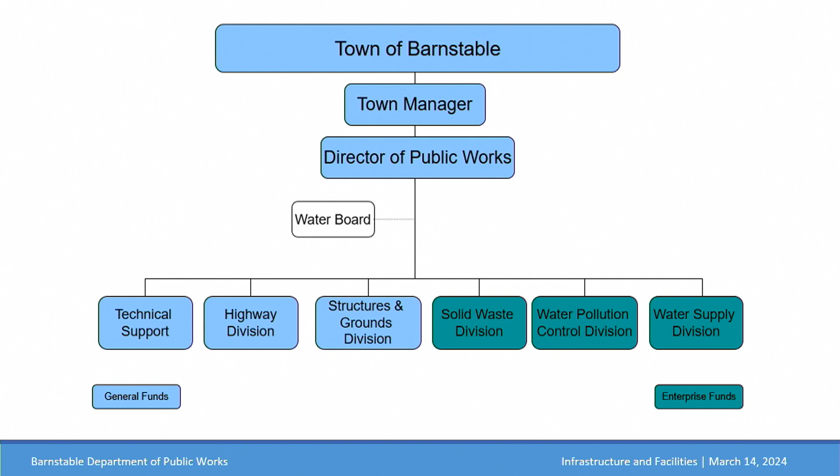As you can imagine, a lot of different types of infrastructure exist in the town of Barnstable. We have 2 coasts and the 4th largest roadway network in the state. I won't read all the types of infrastructure on here, I probably even missed some, but we have a lot that makes the town run. I'm going to focus, as Dan alluded to, on the horizontal types of infrastructure: roads, bridges, marine infrastructure, and I'll touch on water and wastewater at the end.

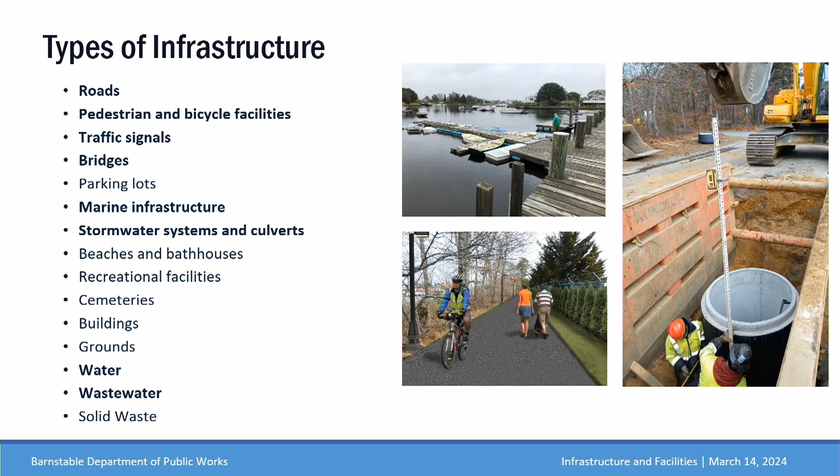So how do we pay for infrastructure in the community? There are really 2 kinds of budgets we do each year. The fiscal year runs from July 1 to June 30th. There's the operating budget, which is for operating purposes. Of the 6 divisions we talked about, 5 are really operation staffs. They're not getting into the capital budget as much as my group would be, or the town architects group, which handles the capital budget, being the projects.

Capital projects are really one-time projects, generally over $50,000. They're requested on an annual basis, and generally the funding is good for a 3-year duration. We submit our requests each November for consideration by town leadership, and the town manager's office ultimately makes a recommendation to the town council. Around this time, we're going to start having those hearings next month. They're presented to the town council in the April timeframe, and funding for those that get voted for becomes available on July 1.

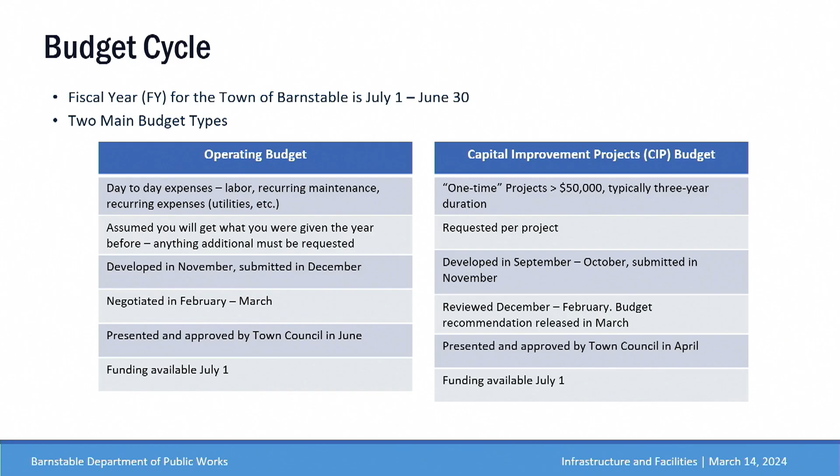So we really have to prioritize, and we have an internal process the town goes through to try to prioritize: which infrastructure projects do we need to do this year, which ones are safety issues, which ones are just desires of the community that need to occur, which ones do we need to do to make sure we stay on top of routine maintenance. I'll talk about that a lot tonight. So just for scale, there are a lot of projects we submit every year for consideration, and by that nature there is certainly a backlog of projects. We can't get to everything, can't fund everything.

So roads will be the first focus for infrastructure, probably the biggest focus I'll talk about tonight. I'll touch upon the other things as well. As I alluded to earlier, this map's a little hard to see on the screen, hopefully better on your smaller screen. The town of Barnstable has the 4th largest roadway network in the state, out of the 351 communities. There are 3 principal types of roads in the town. There are state roads, which in Barnstable are really Route 6, Route 28, portions of Route 132, not all of Route 132, and most of Route 6A, the village center being the outlier, which is actually town-owned or public.

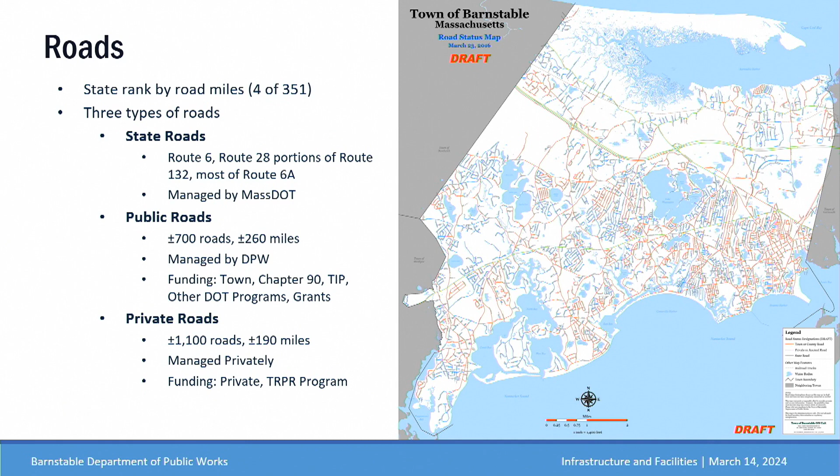There is one other program available for fixing private roadways, and it's really for the connecting roadways that are private. So these large main roads that feel like they should be public roads - there was legislation passed that the town council can appropriate funds to fix those roadways. That has to be done through our sewer construction and private ways fund, and that is a tool that has been used in the past as well to fix certain private roads.

All right, so I alluded to the Transportation Improvement Program. The Transportation Improvement Program is really how regional roadway projects occur. It's a planning document that is required of the Regional Planning Authority, which is the Cape Cod Commission. They're required to prepare it and submit it to DOT, and it helps advise DOT as to what the funding priorities are in the area.

So this addresses roadways as well as transit, as we just heard from the transit folks, and multimodal projects. It's certainly financially constrained each year. It's generally federal and state dollars that every community on Cape Cod is vying for. And it's a critical decision-making process.

And the critical decision-making process really comes via a couple boards that the Cape Cod Commission hosts. One of them is the Joint Transportation Committee, which has a representative from each town. I'm the representative from Barnstable, which works through a lot of the groundwork that informs the regional plan. We make advisory decisions for the Metropolitan Planning Organization, who ultimately votes on the TIP each year. The Metropolitan Planning Organization has fewer members, but they have regional membership from each general region in the community. Barnstable actually has our own member as well.

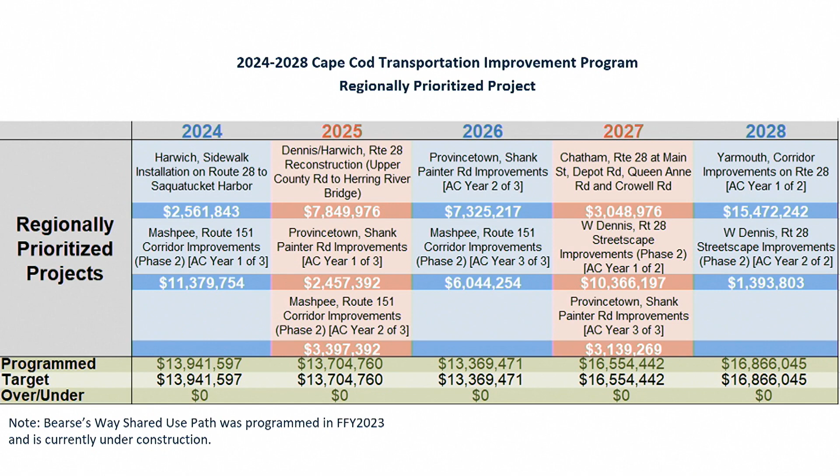This is a graph showing last year's federal fiscal year 24 TIP program, the projects that were funded and how they were funded. Some projects are funded over multiple years, some are not. There are no Barnstable projects on last year's TIP. We did receive money in the federal fiscal year 23 TIP for a regionally prioritized project, the Bearse's Way Shared Use Path Project, which is under construction now and about to commence. If you've driven down Bearse's Way near our office recently, you'll see a whole bunch of stakes and surveyors - they're about to break ground on that effort.

One project not seen here, because it was on last year's state prioritized TIP, was the Cape Cod Rail Trail Phase 3, the first segment. If you look at the Cape Cod Rail Trail, the big gap is Barnstable - Sandwich is currently working on an extension to the Barnstable town line, and Yarmouth has an extension about halfway through the town. Phase 3 is a project in partnership with Yarmouth which will bring the Cape Cod Rail Trail from Yarmouth into Barnstable and to Mary Dunn Road at the end of Independence. That project is programmed for federal fiscal year 24, the year we're in. We anticipate the bids going out later this year, with construction starting hopefully before the end of the year, most likely sometime next year. So that's exciting - finally having the Cape Cod Rail Trail coming this close into the community.

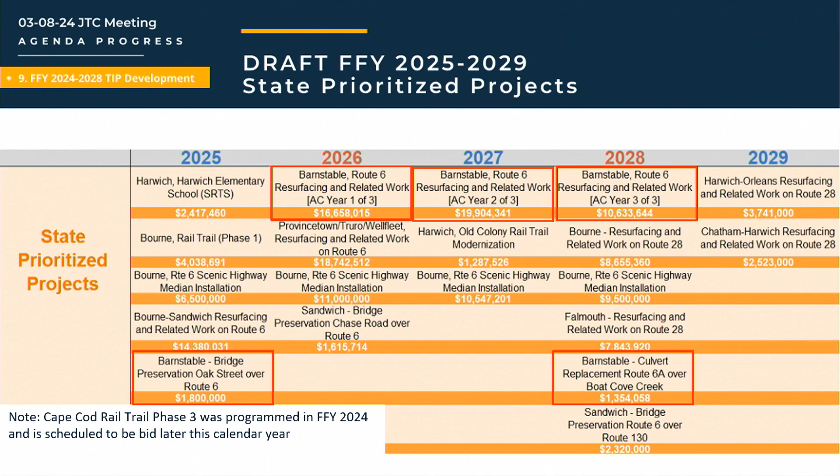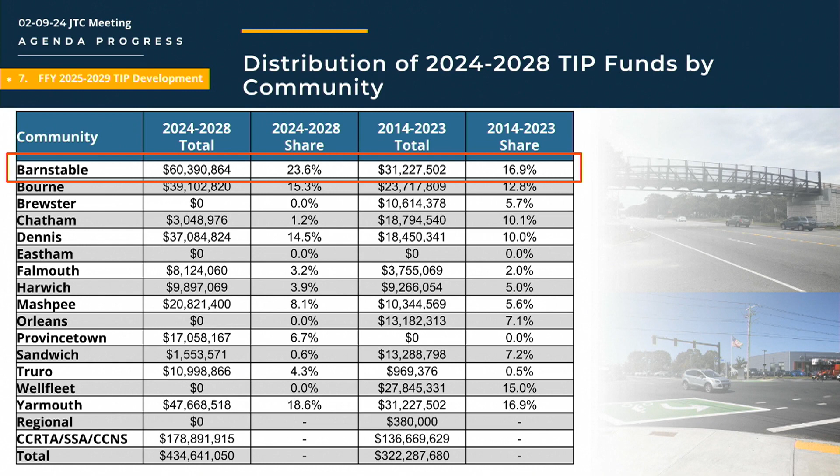I wanted to show the distribution of funding through the TIP - I know I keep talking about the TIP a lot, but it's really important because it's the regional planning document and how these large projects occur. Barnstable, being the biggest community on the Cape, has received a high percentage of the funding - 23% of the funding in the 24 to 28 timeframe. A lot of that was on the state prioritized list, but that's 24% of the money coming into Barnstable. From 2014 to 2023, it was about 17% for the town of Barnstable, which is the highest for any of the communities. So money is coming into Barnstable through that program, and projects are occurring.

There are eligible projects that are in the pipeline in the future as well. So these are some of the bigger projects that we're anticipating seeing coming in our regionally significant roadways over the next 10 years or so, right?

So the Route 132 corridor improvements, that's the town-owned section. That's a project that we're leading. That's a regionally prioritized project that the town of Barnstable is advancing. We're working through designs on that now. We've held our first public informational session on that in January.

That's not going to happen fast. This program does not happen fast. It takes years to get onto the TIP, get slotted, to jockey for position for those funding, and to get placed. But this is a project we're actively working on, and we are envisioning will get funded through the TIP.

We're really hoping it'll be a state prioritized project eventually due to the regional significance, but that's something that we'll be working to achieve later on as we get closer to construction there, right? We think we're probably about 5 years or so away from construction actually starting on that project.

Couple state prioritized projects that our partners at MassDOT are working on, an airport rotary retrofit. So this project actually will start at the end of the under construction road project of the Yarmouth Road and Route 28 intersection, and will come through the airport rotary and not significantly change the geometry.

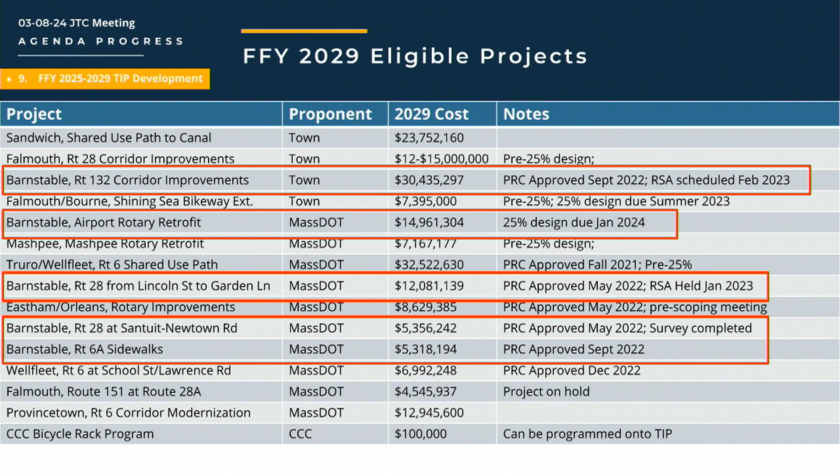Yes? Is that in Barnstable and West Barnstable? The extents of that project are actually from just outside the village to Route 132 currently. Though, being this early in the process, that's certainly subject to change based off public input.

All right, so talked a lot about regional. How do we approach roads here in Barnstable, right? So we do this really principally two ways. We have really a recurring CIP, so capital improvement project. That's our public roads maintenance program. Really what this does is it fixes our roads.

It's preventative maintenance of our roadways such that if you stay on top of preventative maintenance, and that's what the graph on the right kind of depicts, if you stay on top of preventative maintenance and do some of these PM type improvements, you really ultimately save tremendous amounts of money in the long run because as you get into full reconstruction of roadways, it gets significantly more expensive than filling in cracks or just doing a surface overlay or even a mill and overlay. You can see that it's almost exponential, the increased costs as you get to these more in-depth repairs, right?

So our public roads program is informed by pavement surveys that we do every 3 years. What that does is it basically drives every road in town, gives it a score. They're called road surface ratings or RSRs. And we use that to inform what roads need to be fixed, right? So it's a strategic plan. We use data. It's data-driven to make decisions as to which roadways need to be improved. These surveys will suggest the type of restoration that should happen, right?

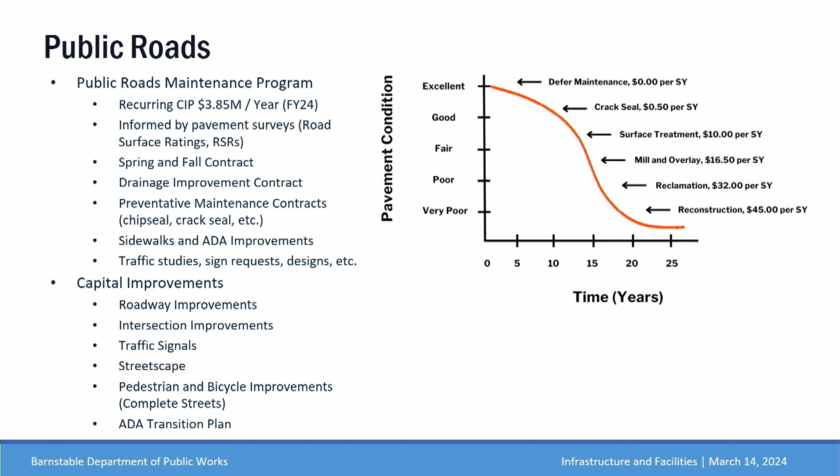So this is the goal. In our public roads maintenance program, we take roads that look like the one on the left and we make them look like the ones on the right. And these are just some of the various techniques we use. So on the right side, you see a crack sealing crew putting all the black lines over all the cracks. That prevents the road from deteriorating faster. Kind of in the bottom middle, that's an example of chip seal around one of the catch basins, and then some of the various other improvements. So those are the types of things we do through that program.

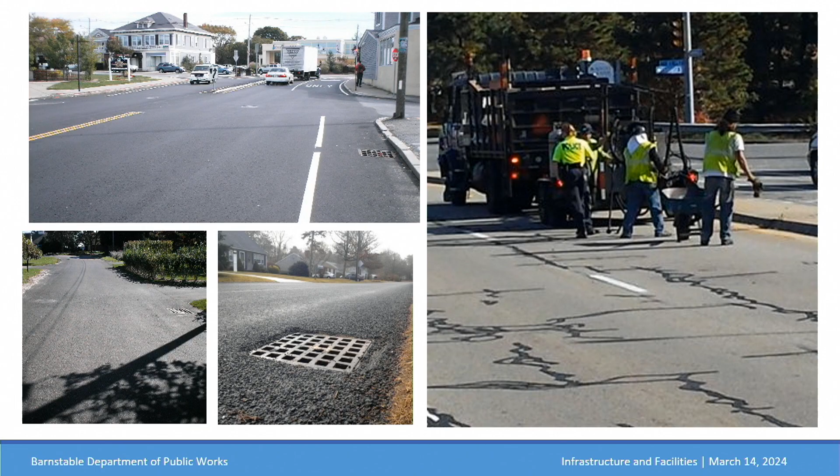All right, safety. Obviously, we want to design our roads to be as safe as possible. This was actually released in October of '22 by the Cape Cod Commission. The Cape Cod Commission developed a document called the Barnstable County High Crash Locations, which identifies through data the locations in the region that have the highest crash rates. I don't expect you to be able to read this. Just look at the boxes. Those are the areas that are Barnstable.

So on the left-hand side is just quantity of crashes. What you'll see on there is Route 28, the large volume roadways in our communities. I think the number one is Route 28 at Yarmouth Road. This was all data pre that intersection improvement. Route 28 at Bearses Way, Route 28 at Osterville West Barnstable Road, which was recently improved, but the data wasn't part of this examination. On the right-hand side is really what I feel is a little bit more significant, and that's a crash rate.

So it's really per million vehicles that go through these intersections. And you'll start to see there are some of our more local roadways that actually have very high crash rates. So documents like this are very important to us, right? We use this to inform what roadways, what intersections we need to be looking at to make improvements on to improve safety, because safety is ultimately the #1 goal when it comes to traffic engineering.

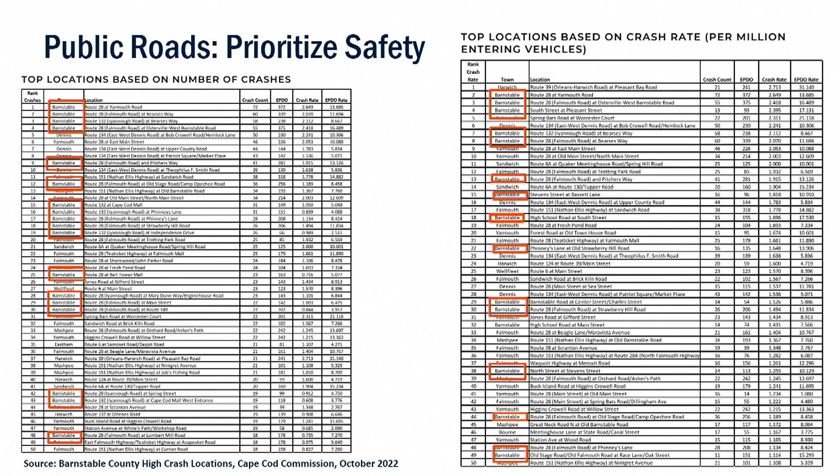It's a good question. It's actually a complicated answer. Yeah, I'm looking at this graph as someone who doesn't drive. If you're walking down one of these streets and trying to cross, yes, they can see the lights right there, but there's no tall light above so that the drivers can see people trying to cross. Even if there's a stoplight, if the person's going a little fast, they don't see because there's no lights on the sidewalks.

Yeah, so every capital improvement project that we do, lighting is something we take into consideration. On some of these larger improvement projects we've done, Sea Street for example, there's street lighting above the pedestrian facilities for that reason. Street lighting is very expensive, but it's something that needs to be done for safety. So the answer is actually very complicated, which is, it shouldn't be, but it is.

Projects that the town makes improvements on and has decorative, quote-unquote, lighting as part of, the town owns and maintains those lights. The lights that you see on utility poles are actually owned, operated, and paid for by the fire districts, generally. That's just the way it's done, which is interesting and complicated. So we field a lot of phone calls at our office: there's a street light out on such and such a road, and okay, we'll call over to the fire district. Not every light on a utility pole is that way, but most of them are. Thank you for the question.

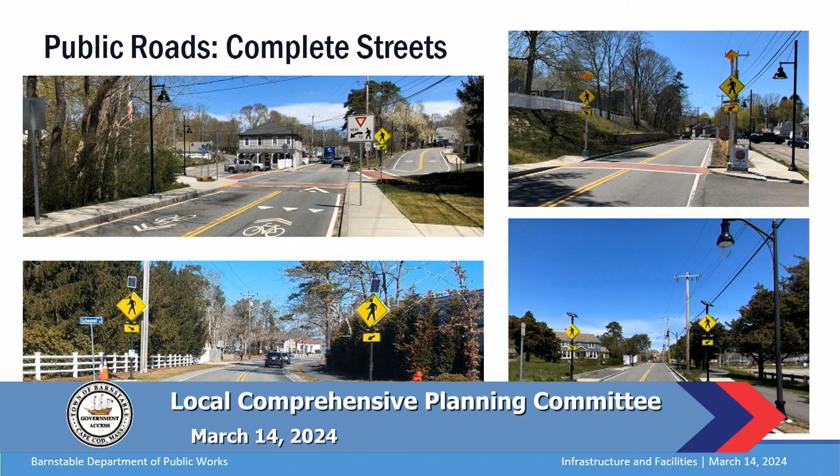These are the types of complete streets improvements that we make. In the upper left is the Marston's Mills Village improvement with some raised crosswalks, flashing beacons, and street lighting. Upper right is also Marston's Mills Village, a different location. On the bottom right is C Street, which I just alluded to. You see the street lighting, the flashing beacons, the shared use path that was installed, as well as the narrowed roads, which were utilized to slow traffic, and I think they have effectively done so. And on the bottom left is a flashing beacon installed next to the Tractor Supply, which was actually done as a developer's requirement for that project.

Spoke about the Cape Cod Rail Trail earlier. I'll expand upon it a little bit. We already talked about Phase 3, right? So that's a project that's going to be starting construction here over the next year. Phase 4 is a project we're still planning.

We've received a number of grants from the state for the survey and the preliminary design of this, and we're actively working on those efforts. And we are advancing towards a 25% design, which is when we really start having discussions with the community about more details of where we're proposing these things.

But effectively, you can see the map. It's kind of hard to see, but it would take the rail trail from the termination of Phase 3 at Independence and Mary Dunn, meander through the community, ultimately across 132 and up the service road to link into where the rail trail is going to terminate in Sandwich.

Large project. We're anticipating it's going to be done in sections. One of the difficulties is certainly crossing Route 132. We're anticipating a bridge as part of that. Going to be a very large bridge too.

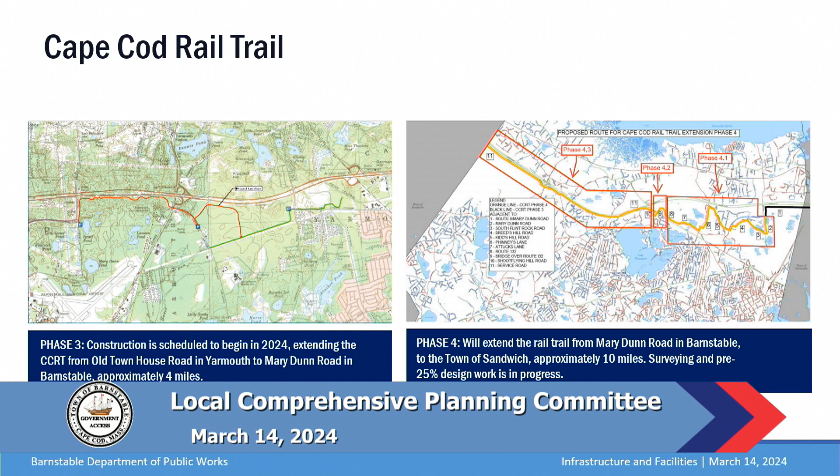So this will be a project that will most likely roll out in sections. We call it Phase 4 now, but we're really trying to work out those details as to how this will roll out. But this is certainly a huge goal of our staff, Cape Cod Commission staff, as well as the state. The state is very interested and supportive in funding this project on our behalf.

All right, so I'll touch quickly on culverts and drainage. Some of our biggest needs that we have in this area is really, and I alluded to it earlier through the public roads program, is maintaining and upgrading our roadway drainage, right? So we have 4,000 catch basins in the community. I think it's actually more than that.

Staying on top of all of those, making sure we maintain those as necessary, so cleaning them out is an effort that we can't do every year. So from an operations side, we do that over the course of several years to make sure we clean them all out. But there is always the necessity for upgrading drainage. Certainly, the more frequent high-intensity rainstorm events we've been seeing over the last number of years has exacerbated that need.

So this will continue to be a big need in the community to make sure that we have proper drainage along our roadway network. The Municipal Separate Storm Sewer System, MS4, is a permit requirement through the EPA. It's effectively requirements of communities for the Clean Water Act for stormwater. It requires illicit discharge detection and elimination, so elimination of potential pollutants through our drainage systems.

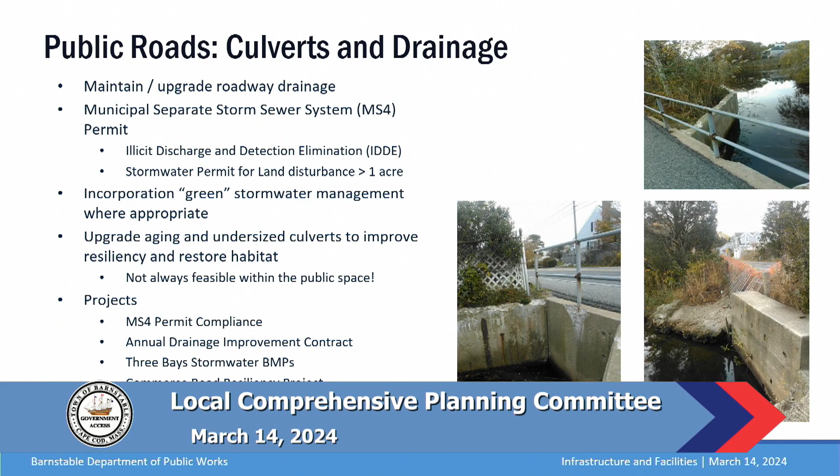We're also working on a couple of culvert replacement projects, one being the Commerce Road Resiliency Project, which looks to raise a portion of Commerce Road for emergency access purposes, principally. The Hawes Ave culvert replacement: there's a culvert under Hawes Ave that has failed and is starting to sink and is a safety hazard, so that's a project we're actually working on now to get that replaced.

And then the Snows Creek culvert replacement is a kind of combination of all the types of projects. It's an aging piece of infrastructure. It could improve salt marsh habitat, and it also can be a flood mitigation tactic. So it checks all those boxes, and that's a project we're working on.

So we started talking about climate change, but climate change, as we're all experiencing here on Cape Cod, and sea level rise are a thing that is more frequent at this point and something that we have to deal with when we're planning for infrastructure, right? The problems that come with climate change are more frequent and high-intensity rainfall events.

So that's something that we'll consider to be an issue the community needs to deal with. And do we prioritize, and there's decisions that come with that, right? Do we prioritize evacuation routes? Do we prioritize certain portions of the community? Do we harden? Do we retreat? How do we deal with this issue that is real, that we need to continue to deal with?

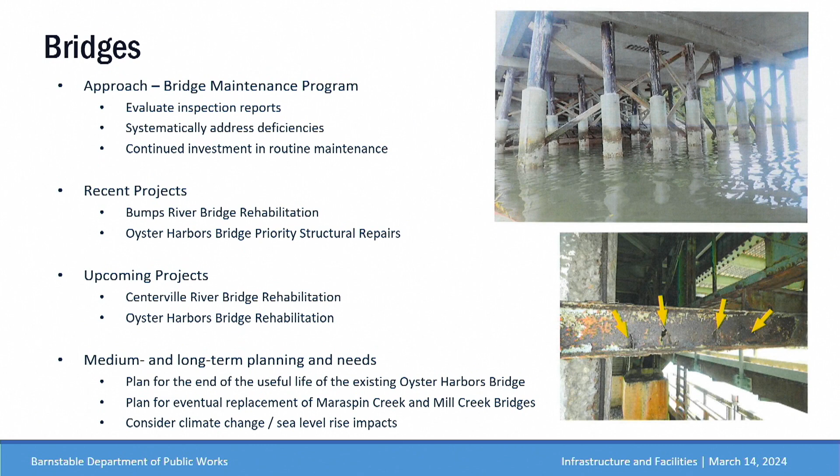And certainly with any significant rehab or replacement of a bridge, we want to consider climate change and sea level rise impacts. So marine infrastructure - there's a lot of marine infrastructure in the community. We obviously have 2 coasts and a lot of waterfront facilities. I'm going to quickly touch on each of these. I know Natural Resources already spoke with you, but I'm not sure they went into the level of detail on infrastructure, so we'll touch on it quickly.

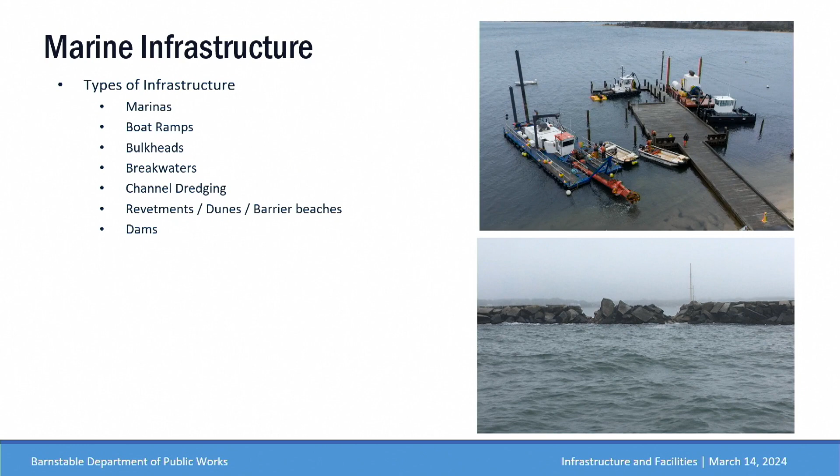So bulkheads, certainly some of our biggest pieces of marine infrastructure. We have 8 town-owned bulkheads. We have a bulkhead improvement program that we started really 2 to 3 years ago to systematically start dealing with these rather than being reactive.

So the American Society of Civil Engineers recommends we do inspections every 5 years of our bulkheads. I can say that historically has not necessarily been occurring. Last year, or 2 years ago, we submitted a capital improvement project to start doing just that - we sought funding for inspections of all of our bulkheads. Those were all done last year. We have recommended maintenance and repairs to our bulkheads as a result of that.

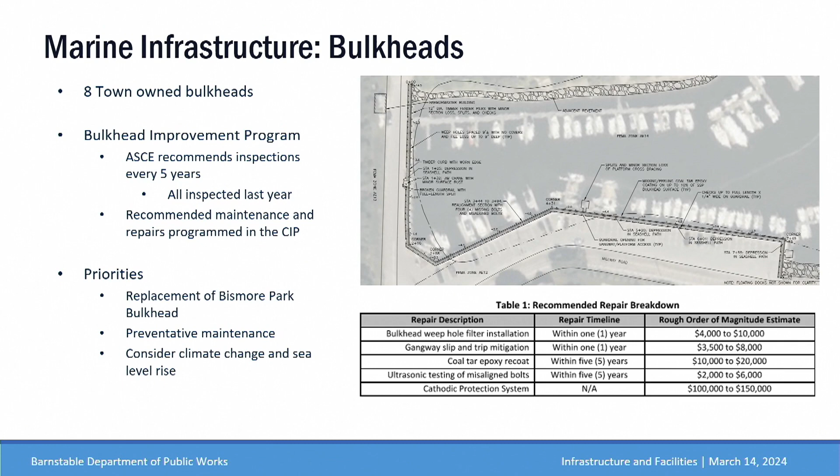And what are our priorities? We have been and will continue to plan for the replacement of the Bismore Park bulkhead, which is ultimately going to be necessary in the near term. Preventative maintenance is certainly something we need to continue to do, and it's this continued theme on all these slides - we need to continue to consider climate change and sea level rise, because that's a real consideration in every one of our types of infrastructure, certainly marine infrastructure.

So with this next slide, I lumped in a whole bunch of things together, but they're all kind of the same considerations, and that's why I did that. So revetments, breakwaters, dunes, and barrier beaches. These are both structural, man-made, or natural pieces of infrastructure that we have, and you don't really think of them as infrastructure, but they are.

They protect our properties, our roadways, our beach facilities. So certainly, again, climate change and sea level rise are impacting these pieces of infrastructure. There's also habitat implications with this infrastructure, so certain projects are restricted in what we can do as a result of habitat that we need to prioritize. So we certainly need to work with our partners at Fish and Wildlife and Natural Heritage to make sure that we can have a permittable project in certain cases that will actually achieve the goals we're looking to achieve.

And a lot of these projects have synergies with dredging efforts. So on the bottom right, you'll see the current breach out at Dead Neck, where the southern storm has washed through that barrier beach. We're in the process right now of doing a dredging project out in Cotuit that will use the sand to fill in this breach. That's going to be occurring over the next month.

I got a quick question. Yes, about the dunes. What are you all doing to make sure that the dunes don't wash away like the ones in Massachusetts where they spent $500,000 and the dunes were gone? What are you all doing to prevent the dunes from washing away?

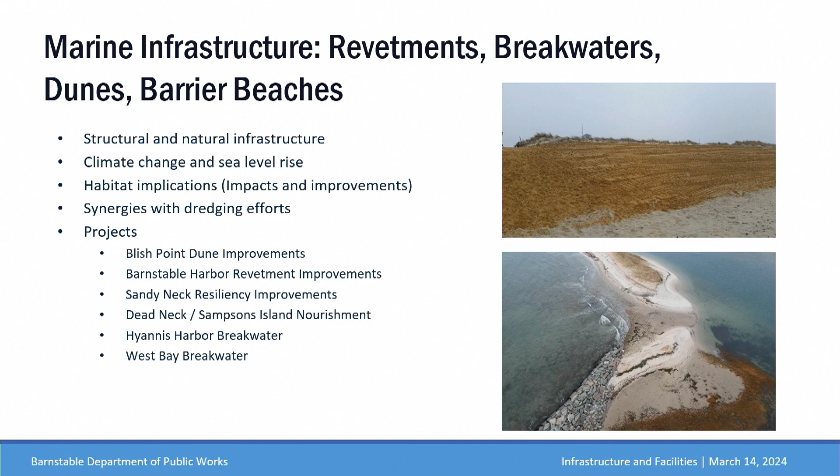That's unavoidable, right? And in some cases, in most cases, that's a direct result of what I talked about before, which is habitat implications.

And there are restrictions and regulations, so in many cases we're not allowed to harden dunes. It's not regulatorily appropriate to do so because they're considered a resource for either habitat or other reasons. For instance, one of the projects I list here is the Blish Point Dune improvement. Every couple of years we have to go out and place sand on Blish Point Dune.

Can private citizens go and do it? There are certain cases where private citizens can. The Wetlands Protection Act says that if there is a pre-1978 home on the property, you can protect it. Otherwise, you can't. So the regulations in some cases make this a challenge.

So there are other ways to have soft infrastructure, is what we call it. Can we change it? It's difficult, but it's certainly something we try to do in certain cases. It's regulated at the state level. It's the Wetland Protection Act at the state that regulates that, as well as habitat regulations in some cases.

At Blish Point, they actually want sand to come from the dune onto the beach because it's good for horseshoe crab habitat in that instance. That's just one case, but you see that kind of thing on all these types of projects.

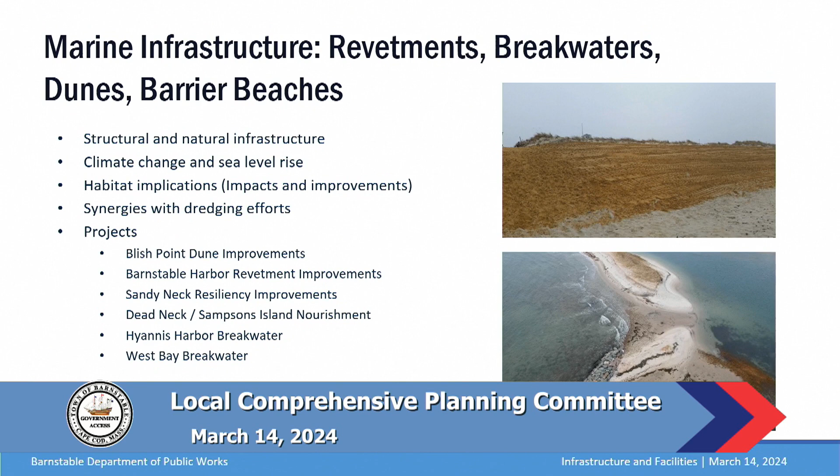So we have some other projects that we're working on - there's some breakwater projects, Sandy Neck resiliency improvements. Actually, Amber in my office is at Barnstable County's facility tonight having a presentation on the Sandy Neck project we're planning, which is ultimately a retreat project looking at moving the parking lot back to protect it, so we don't lose that asset to a coastal storm event. It's another instance where we have to go out and place a whole bunch of sand and spend a whole bunch of money on sand that ultimately gets taken by the water. So we're trying to take a smart, proactive approach to that resource.

Channel dredging - I alluded to it a minute ago. We did develop, a number of years back, I think it was 2017, a comprehensive dredge plan which studied all of our navigational channels. Really, the biggest thing it did for us was identify the frequency at which we need to dredge our channels, based on historical information and the amount of deposition in them. The snippets you see are just an example of the table from that report for Barnstable Harbor.

Really, there are two different types of channels we deal with. There are ones that have nice sandy soils, where the dredge material can go onto a beach as a result. But channels that have silty or, in some cases, hazardous materials - as you get closer to the marinas - can't go onto a beach for obvious reasons. They're not compatible with the beach, or they may even be hazardous in some cases. Those need to go somewhere else. So those are the two different types of projects we have.

We have to permit them differently. For that reason, the ones that can go on beaches, we're in the process of developing a 10-year permit, which basically approves all of those channels to be dredged and placed on a beach for 10 years, and we get to pick and choose when we do that, rather than permitting them over and over again, which is extremely expensive and time-consuming. But the ones that can't go on a beach have to be permitted individually, so there's this continual permitting effort ongoing. Really, when you get into marine infrastructure projects, you really have to deal with permitting and regulations - that's a big challenge when it comes to marine and waterfront projects.

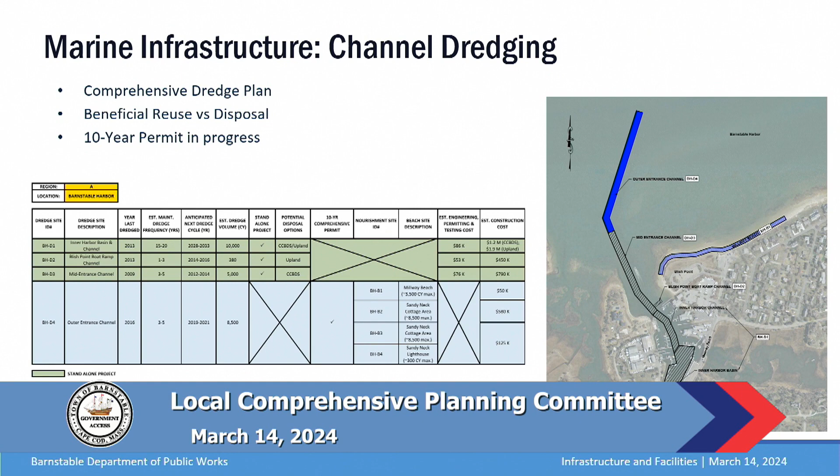So priorities and needs for marine infrastructure: we need to improve our infrastructure to address climate change. We need to have the discussion of hardening versus retreating. It's a real discussion that needs to happen. We can't harden everywhere, so in some cases we're going to be forced to retreat, and in some cases we may want to fight to try to harden. Those are the discussions we need to have as a community, and we need to prioritize those types of projects.

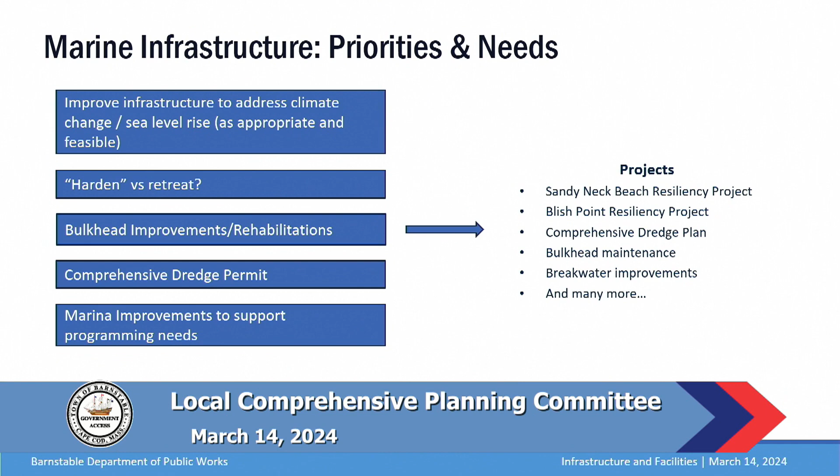Bulkhead improvements and staying on top of our infrastructure is important. Continuing our comprehensive dredge program and achieving our comprehensive dredge permit gives us a tremendous amount of flexibility in keeping our navigational channels dredged. And improving our marinas to support our programming needs—our marinas are the hub of our waterfront activities, and improving them to support the needs there is important.

We have a number of challenges with drinking water in Hyannis that we're dealing with, most notably contamination—PFAS, 1,4-dioxane—are contaminants that we have to deal with in certain of our water supply wells. We do have treatment on all of our water supplies in Hyannis, and we continue to upgrade those treatment practices to make sure that we provide the cleanest, safest, and most reliable water in the community.

So we need to continue to achieve full redundancy. We have a goal, and ultimately are required to have fully redundant water supplies. So if one of our water supplies goes down for any reason, whether it's contamination or pumps failing, we need to still be able to provide water. This is kind of the fundamental reasoning behind our new source effort—looking for new sources of water to make sure we have redundant water supplies. We have enough water to serve our community now, but we do need to improve redundancy of the system.

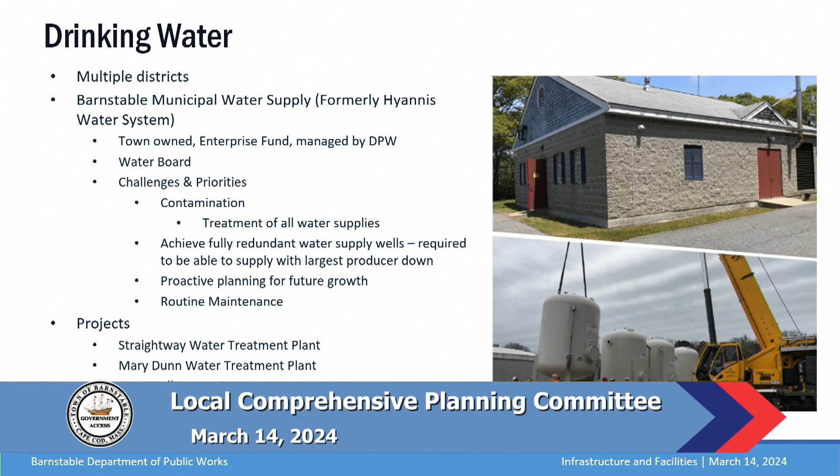Audience question: so you're telling me you all can't just build a little hut and surround all the machinery? Response: unfortunately, no, and it's partially because we're also improving the treatment process.

So I didn't want to get into all the details of that, right? But for instance, at Mary Dunn, we currently have O&M issues related to the amount of iron and manganese that are in our water. So what that does is it clogs up the filters and makes it so we have to backwash them often, which is basically a lot of operation and maintenance, a lot of time we're not sending water into the system, right?

So part of that project will be to add treatment for iron and manganese. We already treat it in one way, but a more reliable treatment that will actually remove it from the water and make it less of an O&M issue. So there's kind of more detail that goes into it there. I just didn't necessarily want to get into all those issues.

We could have a whole discussion on drinking water for over an hour, right? And we're not going to, but who pays for that? Ratepayers, or do we subsidize ratepayers? Yes, it's an enterprise fund, so it is historically ratepayers. The burden of capital projects goes on.

So every year we do our pipe replacement program, which is about $1.5 million of replacement of pipe or lining of pipe to make sure our distribution system is more reliable. It is old in certain parts of Hyannis. Some of the pipes are from 1910. So those are pipes that are still in service.

So we go through and we either replace them or clean and line them such that they are reliable and provide good water quality. We're also going to be rehabbing one of our water storage tanks this upcoming year. So continuing to invest in the infrastructure to make sure this infrastructure remains reliable.

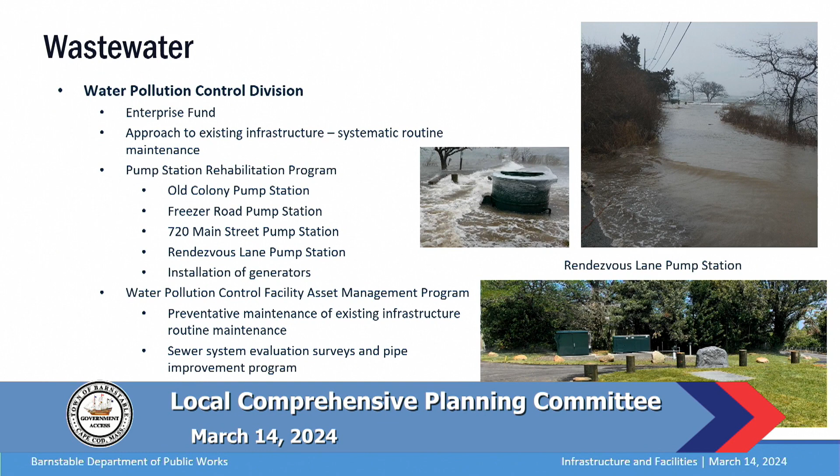We design and implement this program. So we maintain control of it, which is good, right? So we have a vision for how this needs to roll out, and that's how we systematically implement this program, right?

So the program looks to leverage existing infrastructure, most notably our existing water pollution control facility, which is a huge asset to the community. We do need to upgrade it to support the additional flow coming into the facility, but it's a huge head start, right? Yarmouth right now is just today breaking ground on their project, and the biggest part of their project is building their treatment plant, right? We have a treatment plant.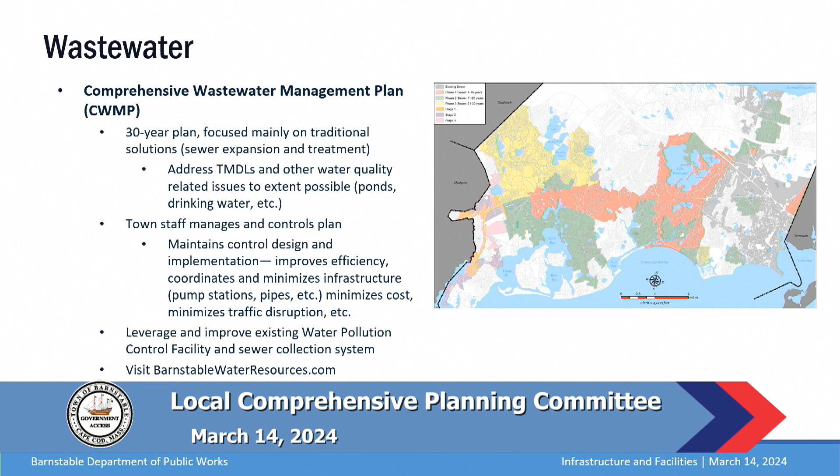We do need to improve it and have significant investment there, but having this plant is important for our implementation of our plans. I put the website there, barnstablewaterresources.com. There's a lot of information there about the CWMP. I encourage you to refer to that.

And with that, I will summarize what I see as our six needs, challenges, or goals, right? We need to continue to invest in routine maintenance to avoid high costs of deferred maintenance. We need to prioritize safety. We need to plan for climate change and sea level rise. Our infrastructure must address our water quality impairment, coastal, freshwater, so ponds and lakes, as well as our drinking water, which are really all connected.

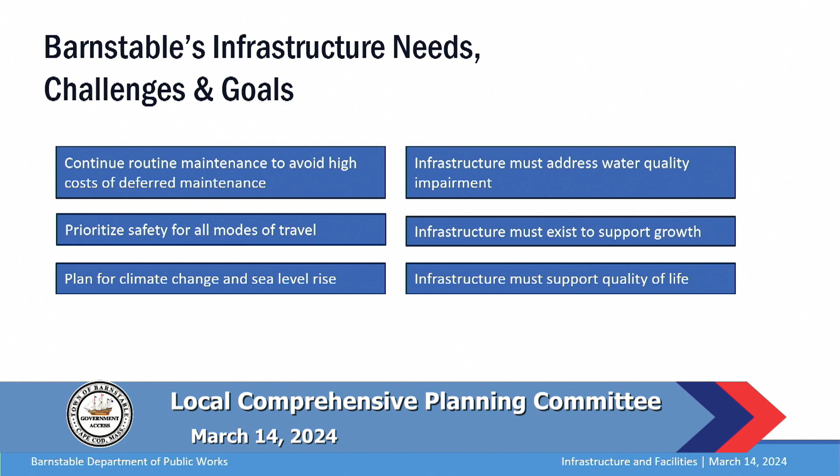And our infrastructure must exist to support growth in the community, right? You can't have growth without the proper infrastructure for growth. And ultimately, our goal is that infrastructure must support our quality of life. So with that, I will stop talking and take questions.

Wow. That was a lot. Who has questions? Big topic. Megan? I had a couple just as we're going through.

Sure. First, I know you mentioned Fish and Wildlife, and I'm not going to out any of the spots for our recreational fishermen, because that would be rude. But is there some outreach towards local groups as far as the bridge repair goes? Because some of those bridges are pretty integral to that. Certainly. So anytime we do a project, we reach out to the stakeholders, right? So for instance, say we were going to replace the Millway Bridge. That's a ways away, but say we're going to do that.

We would certainly need to make sure the folks that use the Blish Point boat ramp are aware that the bridge is going to be out, and the only way to get there is going to be via Commerce Road. Or the folks that want to use the beach facilities or shellfish at Millway, at Blish Point. We would have that communication. We have a communication manager dedicated to the DPW to help us communicate those types of goals. And certainly in advance of projects, we hold public meetings and informational sessions to educate folks and to seek public input in our projects.

All right. And I had a few, but I'll cut it down to two. Parking. Is there truly a lack of parking? I understand that there may have been a study in 2017. There's a lot of talk about that. And personally, aside from Christmas at the mall, even years ago, I never really had a problem finding parking. Right, so there was a parking study done for downtown Hyannis a number of years back. Elizabeth could probably speak to that better than I could.